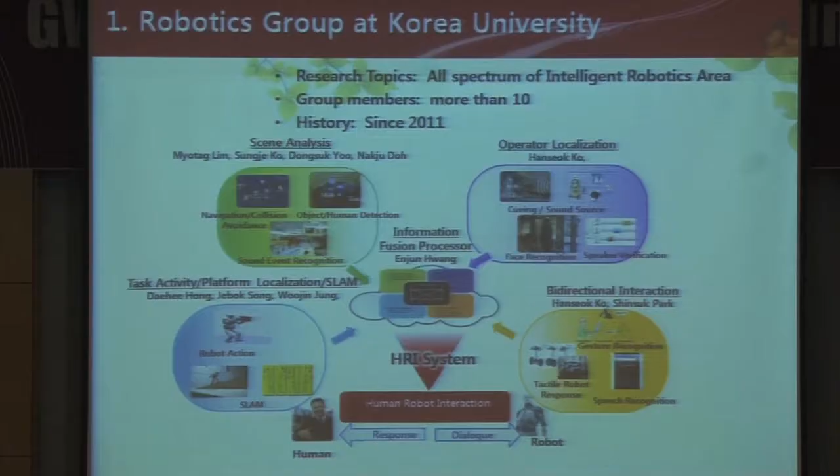These four components combine to form what's called the information fusion processor. I've listed out the names; I'm not sure if I've left any out, and if I did, please excuse me. I'm certainly very open to more names there.

Now I want to talk a bit about the challenges we're dealing with in terms of technologies. A robot needs to be interfaced not just with the world itself, but also with a human operator, so it has both ends of communication. I've listed out the important components, for example, robot movement, action, navigation, and how the robot sees the surrounding world, but also how it communicates with the human.

For example, gesture recognition and speech recognition are very important elements. Once again, merging and combining all this information is done through the middleware, and underneath that is the information fusion processor.

The idea is that until very recently, most robots we're familiar with were very much movement-oriented, and even though considered intelligent, still very passive. What we need to inject nowadays is to make it more interactive - interactive with humans, interactive with surrounding scenes, and interactive by utilizing resources from the cloud. Here's an example of what we envision.

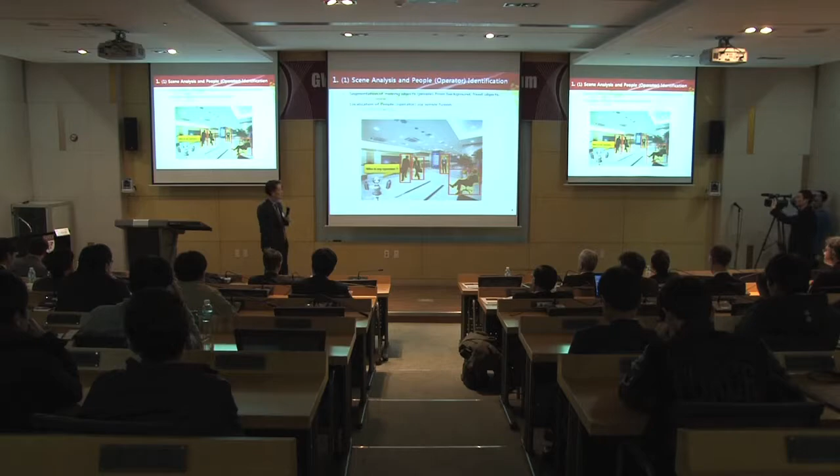The challenge is how do we overcome such environmentally challenging situations? How do we make it very environmentally robust?

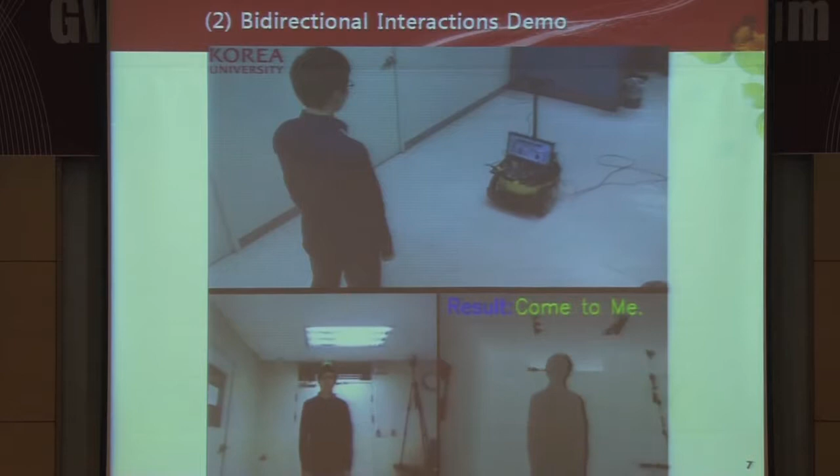Let's look at what the current technology is at this point. This person, one of my students, is making comments, and as you can see, it recognized the direction of the sound source, and then it also recognizes the gesture scene, which some of the faculty visiting today or this morning were able to see demonstrated.

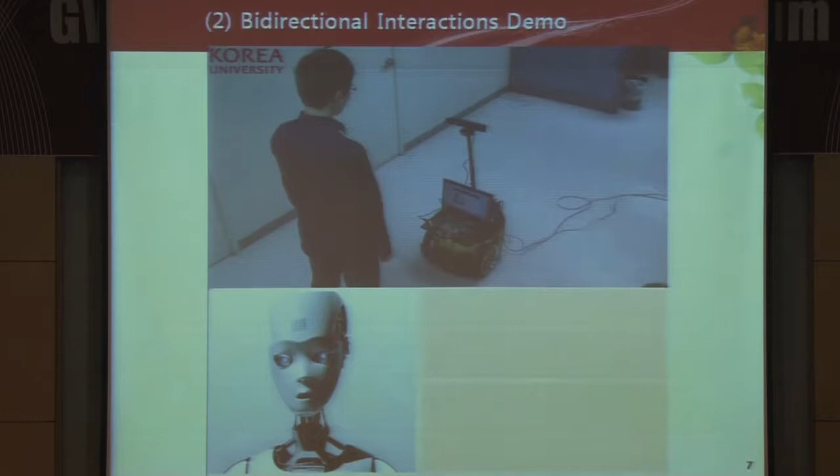And the system recognition—he's asking, when did I take my medicine? Obviously, the robot is providing some nursing assistance. So the robot responds that you need to take the medicine at 1 p.m. today, and so forth.

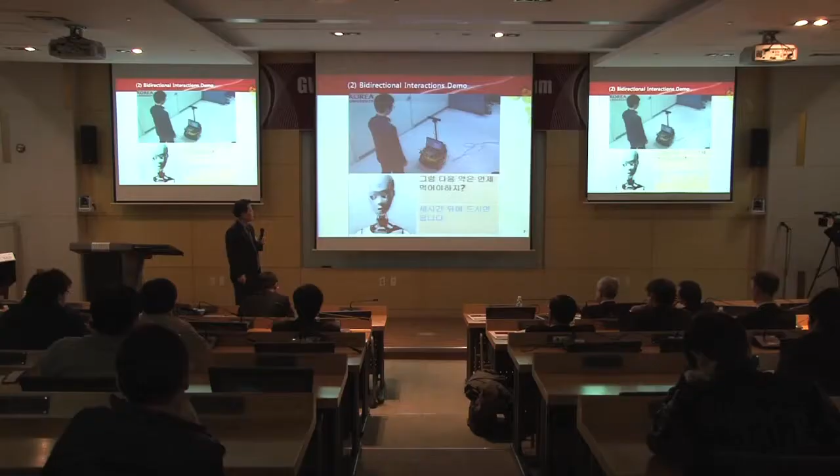So as you can see, it's not just engaging in a conversation, but engaging in a conversation has to be done real time, right? And a lot of computing power there is probably very much overloaded. So how do you reduce that computational overload and make everything work real time, so that human interacting with the robot feels very natural? That's going to be pretty challenging.

Let's look at another scene here. This is a robot. There are a couple of things going on here—some sort of glass breaking scene taking place. But there are also other sensors.

We want to call it a perception sensor network that allows, with some sort of communication network, sending information to a moving platform, which is the robot. So if there are cameras and microphones sending information about a certain accident taking place, the robot may not be aware, being remotely located away from where this incident occurs.

Indeed, there are other sensors that can also help. The only thing they can do is when they're connected. So connection, the networking, becomes a very significant challenge at this point.

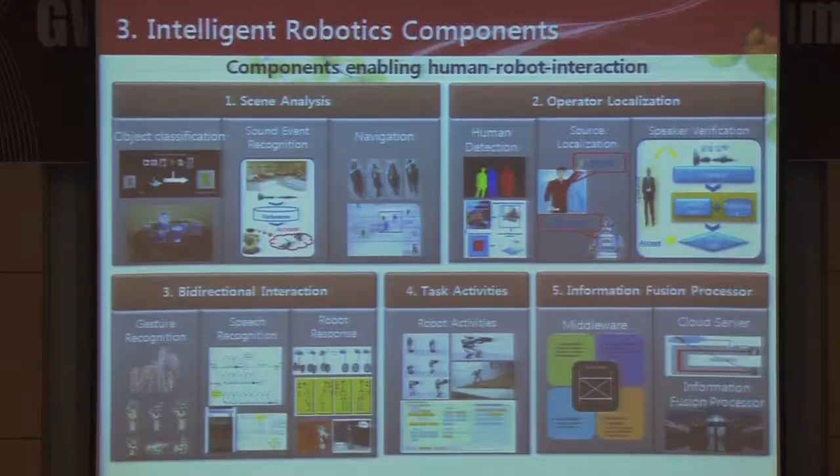So I've itemized different technologies here, important components from 1 to 5: scene analysis, operator localization, bidirectional interaction, task activities, and information fusion processor.

I'm going to go very quick since I'm running out of time. Here's an example of scene analysis. It needs to look around the scene, the background, and also be able to recognize where things are and what these things are. So there's a need for classification using shape and visual features.

There could also be certain moving objects. For example, if the robot is standing here, there might be some sort of moving object, maybe another robot, on an imminent collision course. What do we do? You've got to process that information and be able to take certain actions. So motion modeling also becomes very important.

I've listed out some of the technical issues. I want you to take a look at the brochure and go through these issues. I want to identify maybe one that pops up here.

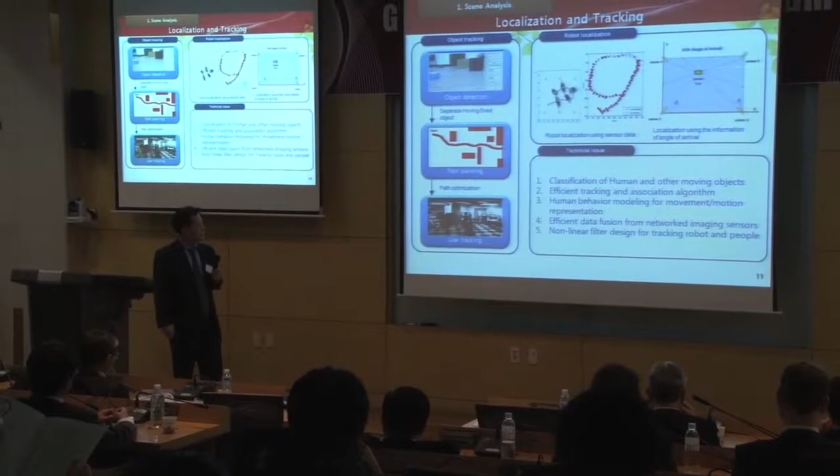This is localization and tracking, another big issue with maybe sensors, with different lighting, how the structures are surrounded. There's also a need for path optimization. A lot of work has been done in this area, but still there are plenty of objects that are not necessarily arranged in a neat fashion. So there's a definite need for a lot of different sensor and data fusion of networked imaging sensors as well.

We could also perform sound recognition. We saw that a little bit through another slide, so I'm going to pass on that.

Speaker verification is another hot area, being able to recognize who the master is, and perhaps use that also to segment different persons.

Operator localization is, as we gave you a demonstration this morning about where the sources came from, which direction the sources came from—that also becomes very useful information.

Human detection and tracking: if there are a number of people sitting or doing certain activities together, if I were the robot, how do you recognize that the person standing in the middle is indeed the person I'm trying to communicate with? That becomes very challenging because all these three people are overlapping each other.

There's a lot of people that are not necessarily all separated. So separation becomes a big challenging issue, and we have to do that under all kinds of different lighting conditions.

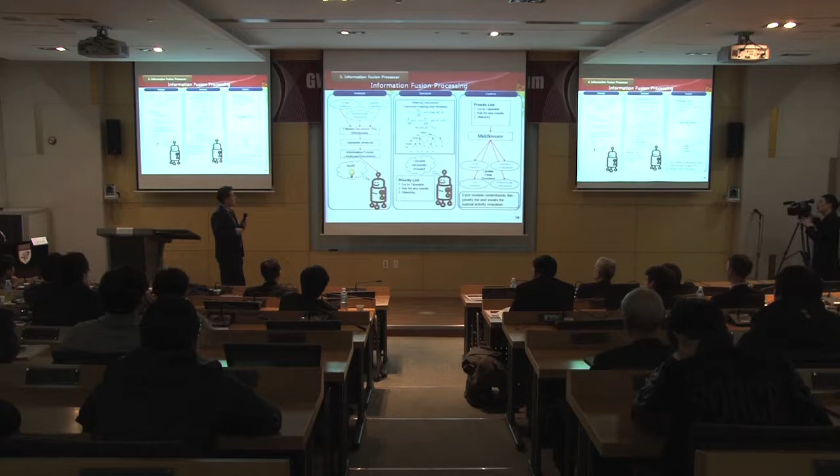But here, the robot needs to do certain reactions as a result of that, and the way it does this is by reordering the priority list.

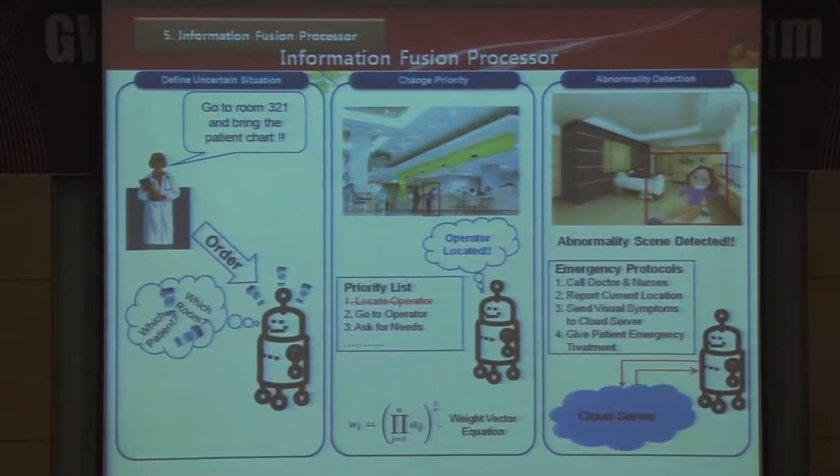Suppose, for example, the robot receives a certain order by its master: go to room 321 and bring a certain patient's chart. But while en route to that room, the robot finds some person collapsing. Then the priority list needs to be reorganized or reordered. That's the kind of thinking process the robot needs to go through.

So therefore, a lot of these models - models of actions, models of decision procedure, models of priority - need to be developed.

If you want to have different models for different actions and reactions by the robot, then we need plenty of memory space, and that can be done only with a cloud system.

The other thing is, what if there's a robot here, and then there's another robot which is closer to where things of more important significance are happening at the same time? Then we need certain hand-off type of steps taking place. That could be done only when you have this cloud computing, where all the information gathered is again computed in one common area - we call that the cloud system.

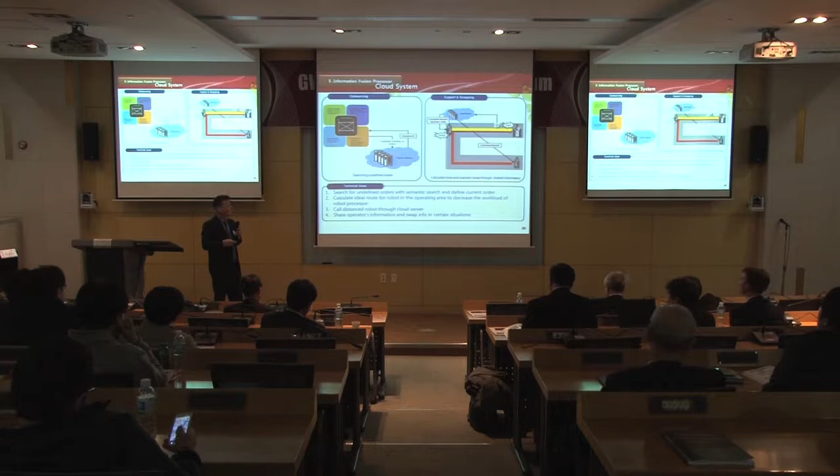That's where the information fusion processor is located. So all these six components are different technologies and techniques where most of the faculty involved with the robotics area now at Korea University are engaged. There's still a lot of work that needs to be done. We're very much excited, and we're looking at a number of different scenarios of application.

This is for the robot that's roaming around outdoors. Outdoor activity and the surrounding environment is also another big challenge. For example, Kinect wouldn't work outside, so gesture-type algorithms that could be used indoors cannot be equally applicable outside.

So we'll be looking into this, as there's even more challenge for outdoor activities as well. We also look at a lot of application scenarios for indoor services, particularly nursing assistance type services. We do have a hospital here on Korea University campus.

That's the same way at GW. So here, where the patients are located, a lot of assistance could be provided by a localized robot. For example, this patient is obviously going through some sort of pain and needs some sort of help by the robot. I didn't have time to finish all the translation, so certain things are still in Korean, but essentially what it's trying to do is have the robot provide services there. So it's one of the scenarios we're looking at seriously.

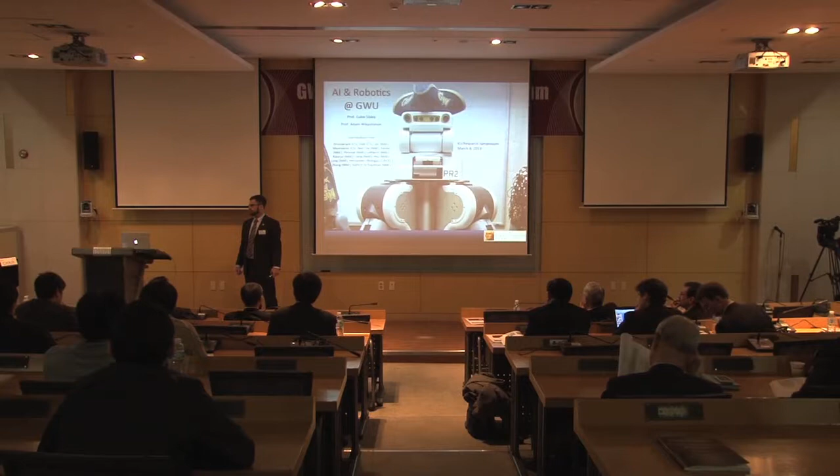Thank you very much. I think the siesta is in order. Lunch was wonderful, and now, of course, a little bit of a food coma.

So I'm going to talk about AI and robotics at GW. I'll introduce a number of my colleagues throughout my slides, and I'll dwell on my own work a bit more of necessity. Then I'm going to hand off about halfway through to Professor Adam Wikenheiser, who will talk about a bunch of the other work taking place in mechanical engineering.

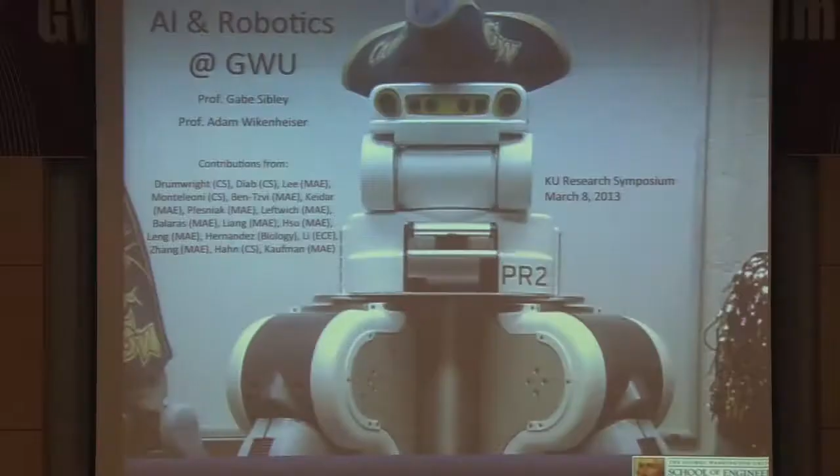This is the same story for accessing hostile environments, like exploring under ice sheets. We're not going to go there, at least not for very long, and do any sort of interesting science. Autonomous aerial vehicles are, of course, useful for surveillance and other applications. Autonomous cars—this is going to transform society.

This is one of my pet favorites: Rio Tinto has invested literally billions of dollars in automating mines in Australia. Kiva Systems was recently acquired by Amazon to automate a large percentage of their operations in their warehouses. So these machines are really coming online now.

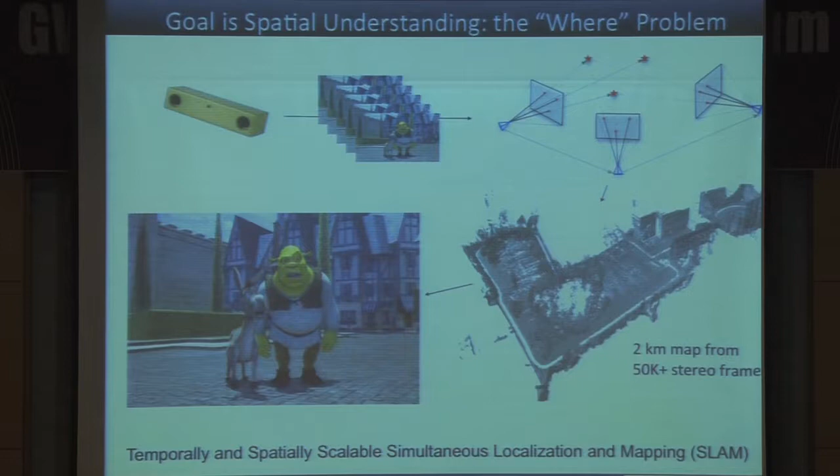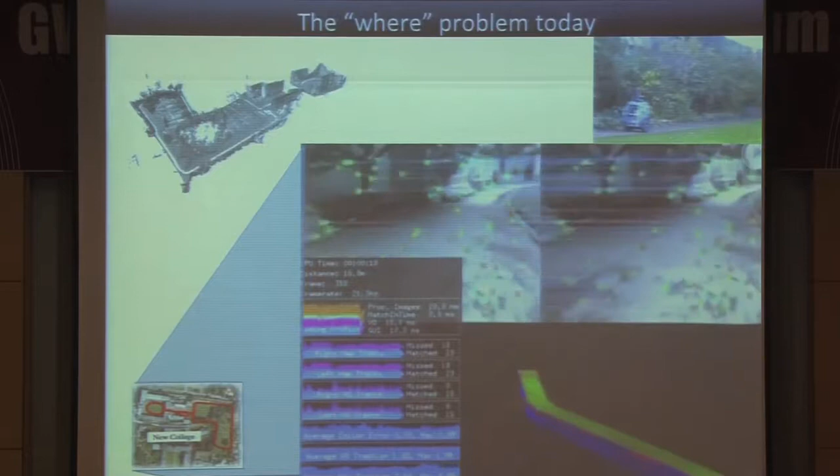So we're really interested in temporally and spatially scalable solutions to this problem, the so-called where problem — how to know where you are and where objects of interest are if you're an autonomous machine. For example, here is this robot Lisa going around and collecting data. It's got a stereo camera pair up front, lasers on the side, an omnidirectional camera on top.

And this down here is the left and the right image, and features being matched in the left and right image and tracked in time, all of which allows you to uncover the geometry, the trajectory that the vehicle has followed. And this is endowing the machine with basic spatial awareness.

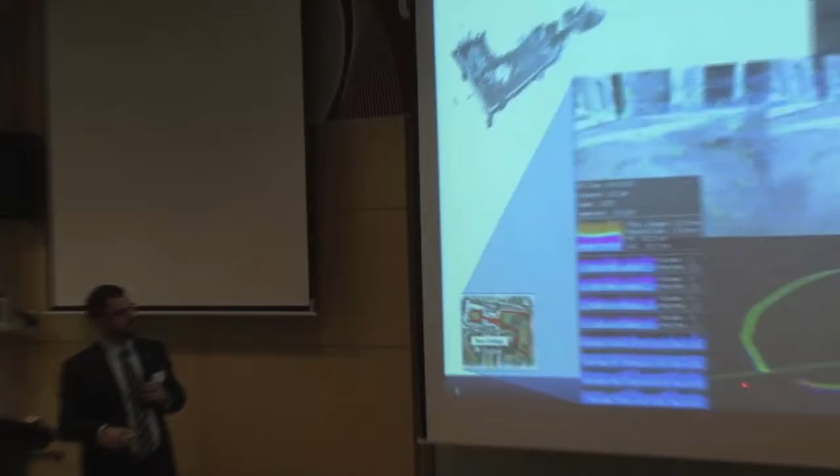So this will go on and go for a number of laps, and this is the open loop system running here. It runs for 2 or 3 kilometers, at which point it's only made a mistake of drifting by 2 meters. So it's not drift-free because it's purely vision-based, but it's still quite accurate. You can see this is the overlaid solution on the actual college.

But we said we're interested in spatially and temporally scalable systems. So here you see that 2-kilometer trajectory that was being estimated, embedded in a much larger map around Oxford. And here's Oxford, and here's the trajectory going down to London, and a bit more of this trajectory along London. So this is 121 kilometers of purely vision-based estimation, again trying to endow the machine with an understanding of its spatial relationship to the environment.

This is carefully anonymized for peer review. This is the system that was actually used for data collection.

The stereo pair on top of a bicycle helmet and a laptop on the back. As I said, these are being replaced with cell phones now. So it's over 7 hours, 121 kilometers, 200 gigabytes, many complicated real-world scenes like riding on a bus or an escalator or an elevator, riding the boats on Ferris wheels, things like that.

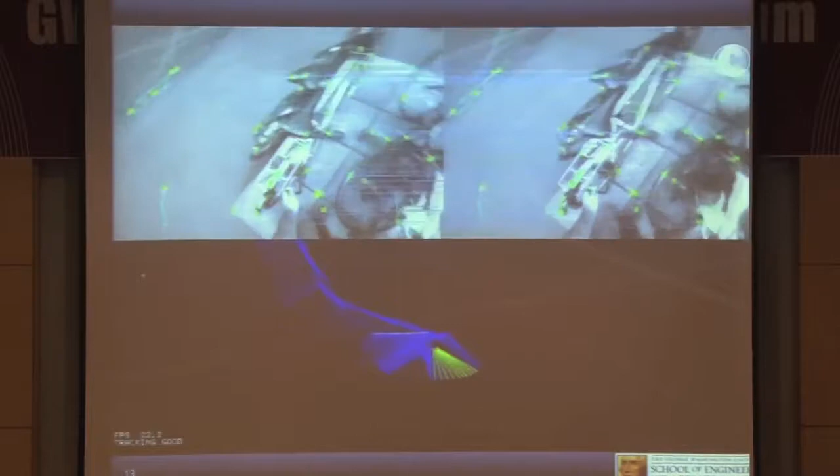Here's a bit of the beginning of this data sequence, and you can see the red, green, and blue X, Y, and Z position of the vehicle or the user as this system evolves in time, and the features being tracked. The point here is that this is not carefully collected data to make the problem easy to solve. It's explicitly from the wild, difficult situations, as you would encounter if you were a natural humanoid traversing natural human spaces. You can see the user here is looking down, getting ready to get on the bike, and you can see the direction the user is looking by looking at that red vector.

And as he rides away, you'll see the constant velocity motion estimate of the bicycle. This is the type of challenging situation that we're going to encounter in the real world, right? We want to open up that performance envelope to challenging lighting conditions, extreme motion blur, dropped frames. If somebody covers one of your robot's eyes, it still needs to function, right? So that type of robustness is actually extremely difficult to obtain. That's where a lot of the future work still remains to be done.

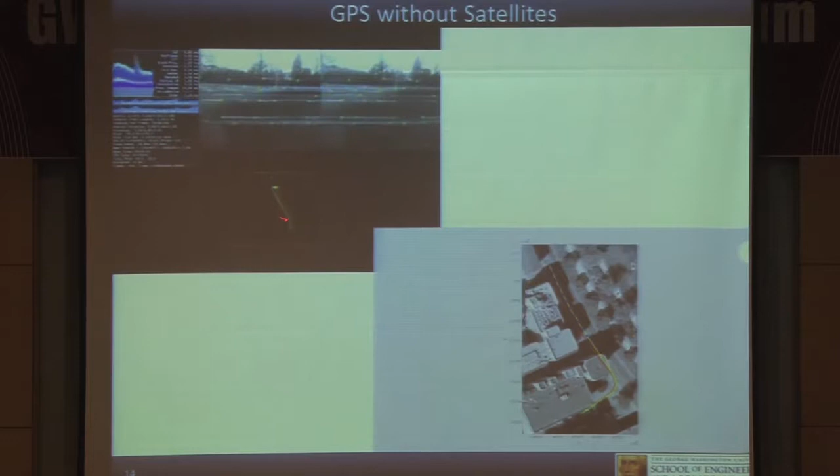Just an example of what you can do with this. So here you have the same system working on a vehicle. This is the beginning of a 1,000-kilometer sequence that's testing place recognition and object recognition, loop closure algorithms. And what you can see is the actual geometry of the road starting to unfold. We see it obviously. So armed with that, you can then try to generate synthetic overhead views and actually match what you see on the road to what you would see from an aerial image or from a satellite.

So this is GPS level pose estimation without satellites, just by matching what you see on the road to what you would see from overhead, right? GPS without satellites. And of course, this is going to be really important for automating the highways.

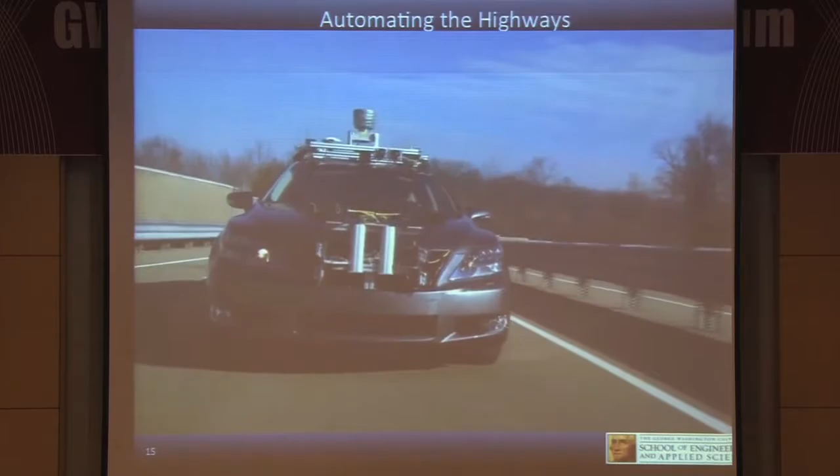I always like to tell the story: 10, 15 years from now, maybe sooner, our kids are going to say, wait, you used to get in those metal cars and turn wheels and pull levers and step on pedals to make it go? You guys are crazy. You should let the computer do that, it'll be way safer. And they'll be absolutely right. It's going to revolutionize our relationship to the vehicle and to our cities. It's going to be like a transformation from before automobiles to having automobiles. So that's a big impact that our science can have.

The future is also fast, so pushing that envelope on perception on platforms like Big Dog or RHex or this quad rotor here, which is cheating because it has off-board sensing, is very challenging. We believe that the future there, this is work by a postdoc, is in dense systems, estimating where every pixel is. This is many gigabytes of data per second being processed, too much to send to the cloud, but enough to really understand the local metric 3D structure that you're interacting with. That gives the system quite a bit of robustness.

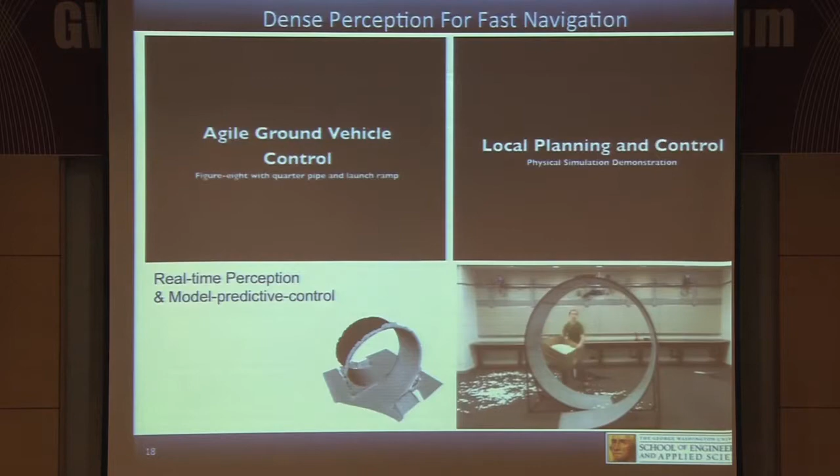And of course, armed with really nice dense 3D models, then perhaps you can do interesting things. This is ongoing work where we're trying to really tie the loop between dense perception, build these models, and then plan, paying attention to the physics, the underlying interactions with the real world, so that we can hopefully do things that you can't do otherwise. See, it's not quite there yet. The goal here is to build a car-catching robot, of course.

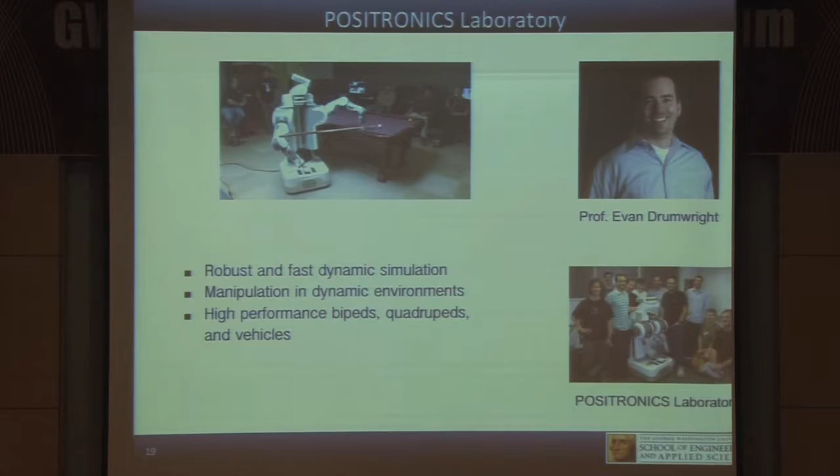Okay, so the Positronics Laboratory, partner in crime here, Professor Evan Drumwright. He is an expert in robots and fast dynamic simulation. So given these models from perception, Evan can tell you how the contact forces and the restitution forces, and how you should go about simulating your interaction with the environment to get accurate results. These are his students here in the Positronics lab. And that's not our PR2, but we actually do have a PR2, which is a wonderful platform for testing these situations and these experiments. Of course, there was great reference to natural language processing and actually speaking to these machines.

And that's what we want to do, right? We want C3PO, who is familiar with over 6 million forms of communication, so that we don't have to type, because we're really bad at communicating by typing, but we're really good at it by just speaking. So that's where you get into natural language processing.

And we're fortunate to have Mona Diab. If you're interested in NLP, she's recently joined GW, and she is a world leader in NLP, specifically in text translation and Arabic language, statistical approaches to NLP. Of course, NLP is intimately related to machine learning and computational statistics, and it fits within the taxonomy of subjects within computer science as a very core technique.

A lot of the techniques that we actually use in computer vision are borrowed from NLP. Who uses NLP? Well, today, obviously Google. We're talking hundreds of millions to a billion dollars. And this is another technology we're intimately involved with that is going to transform society, especially coupled with solutions to the perception problem along the lines of object recognition, place recognition, and relating that to the symbols that live underneath.

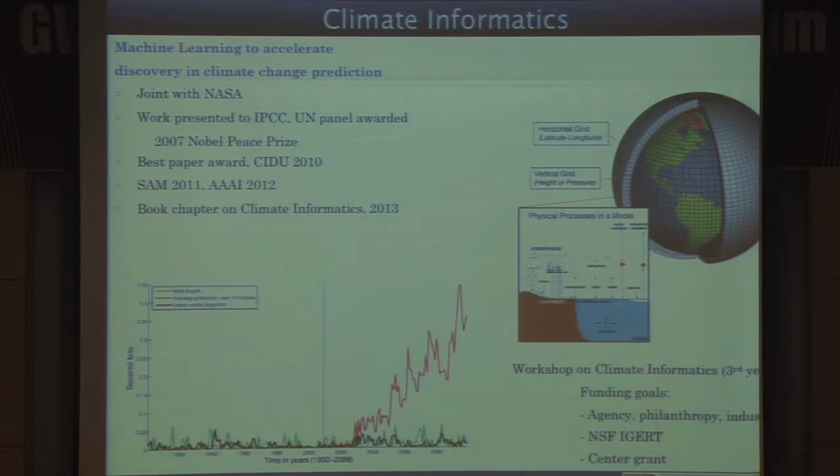Machine learning is intimately related again with natural language processing. Claire Monteleoni has recently joined GW, and she is actively working in machine learning. Her interests are particularly to do with climate modeling and climate informatics, applying modern techniques from machine learning to advanced climate models. She's had quite a bit of success running a workshop on climate informatics, which is getting a lot of attention. So these are modern computational statistics, modern techniques applied to very pertinent problems in sustainability and climate modeling.

Okay, so with that, I'm going to hand off to Professor Wickenheiser, and he'll tell you about a number of other ongoing projects at GW.

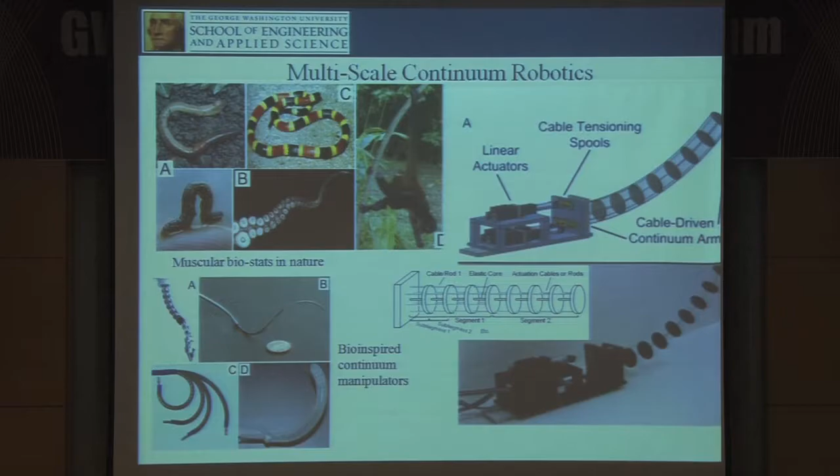You want to make the incision as small as possible, but you also might not know ahead of time exactly what route you need to take to get to the area that you need to either do your sensing or do your surgery in.

So the multifunctionality needs to exist between the actuator, the distributed actuation, and the distributed sensing. Because not only is it difficult to form all these different shapes and coordinate all the different actuators to work together, but you may not even know what shape you want to form.

So when you start to go into the body, there's got to be some way that you can work with the surgeon, but also use local feedback. If you start to run into something, you need to be able to decide, do I want to go through that, or do I want to go around? So that sensing has to exist there as well.

And of course, this is something that is very easy and second nature to all of these animals that can do these things. So they use sensing along their whole body to be able to manipulate objects, to be able to locomote, and transition between the two as needed.

On the right there, the monkey uses its tail both for grasping and manipulation, but also for locomotion. Some of these other animals use theirs as well.

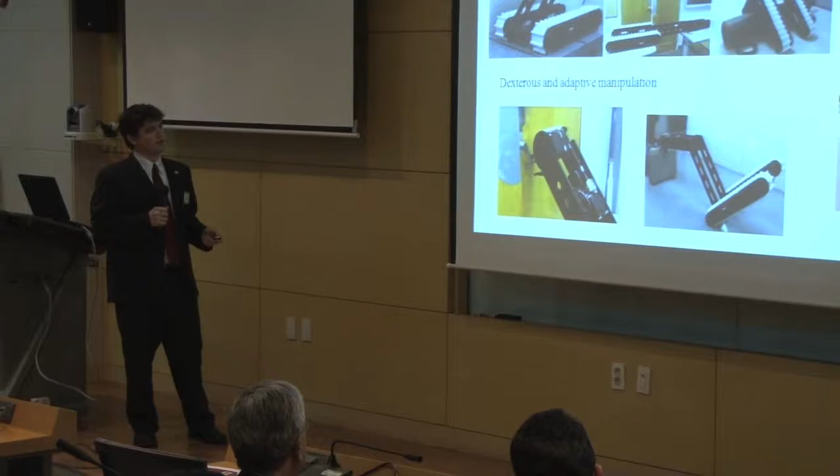So again, we have this sort of adaptivity between the locomotion and the manipulation. We have the same components here operating the door handle as would be used for manipulation and also for dragging it along if needed.

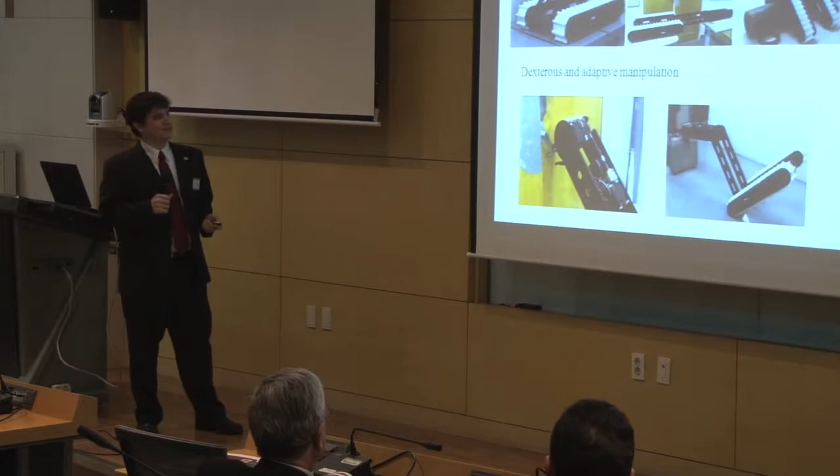And the thing that's interesting about this, in the words of Professor Ben Sweet, is that it has a high payload capacity, so it can actually carry itself as it goes through these different morphological changes.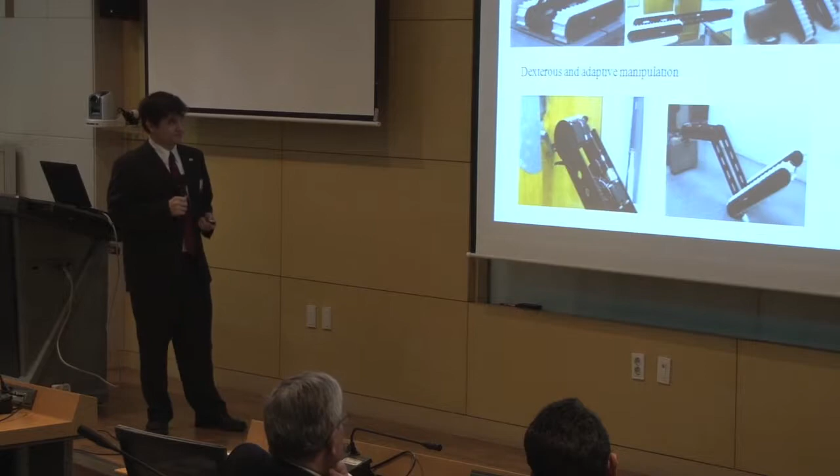So this is a little bit of my research here, another bio-inspired design. In this case, we're looking at wing design and incorporating some of the features of bird feathers.

One thing that's sometimes a misconception about bio-inspired engineering is that we're trying to duplicate what happens in nature, and that's not the case here. We're still using man-made materials, and we're trying to approach natural systems, but also keep in mind the fact that we can do some things that nature can't do.

We have these revolute joints. We can put processing into the actual sensors and actuators to short-circuit the feedback loop.

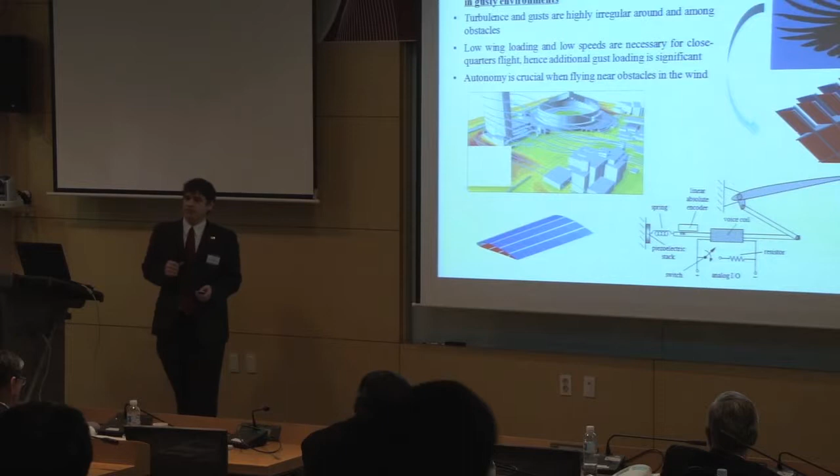And one of the things that I'm interested in here is looking at very small and very lightweight vehicles. There's a large demand for bringing unmanned aircraft into smaller, tighter environments and also unknown environments where you might need to make split decisions.

As you shrink the size of the aircraft down, you necessarily have to shrink the weight of the aircraft if you want to fly it at low speeds, low enough to avoid collision in these tight environments. Unfortunately, that's a deadly combination when it comes to wind gusts and turbulence, because now you're talking about a disturbance that's significant compared to the total energy of the system, or the total inertia of the system.

Not only that, but you have this very structured turbulence around buildings. This is a simulation, I believe at MIT, to look at the flow around different man-made objects. You can find similar simulations through forest canopies and across mountains. So you have these large, structured gusts and wind disturbances that are on the same order of magnitude as the size of the aircraft.

So one wing could be experiencing a completely different flow from the other wing. One wing might have attached, almost laminar flow, while the other could be completely turbulent, or could be experiencing a vortex shedding oscillation that interferes with one of the dynamic modes of the vehicle. So there's a lot of unknowns that occur here.

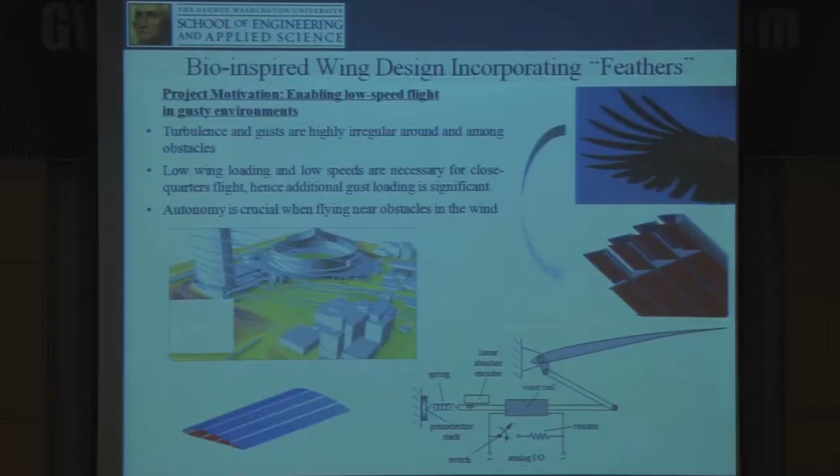But of course, birds can fly through these environments very easily, right? One thing that comes to mind is looking at seagulls on the shore. You have these very strong winds coming off the water, and yet they're able to make very small adjustments with their wings, particularly the wingtip feathers, and remain almost hovering in the face of these very strong winds. And they can keep their eyes steady.

So scavengers, birds of prey, obviously to feed, they need to be able to detect the prey that they're going after. And if they're being constantly rattled by turbulence, they're not going to be able to see these things from great distances. So of course this has application in surveillance and also targeting and mapping, where you might need the sensitivity of the sensor, whatever that happens to be.

You might need to be able to remove some of these disturbance loads that you get from the turbulence. So we're looking at how we can mitigate that and isolate it towards the wings. It's almost like a reflexive action—if you touch something hot, you're going to remove your hand before your brain even registers that you did it. So what we're looking into is how do we put some of this intelligence of how to respond to wind gusts into the wing itself, so that we're locally responding to the disturbance and not relying on inertial measurements.

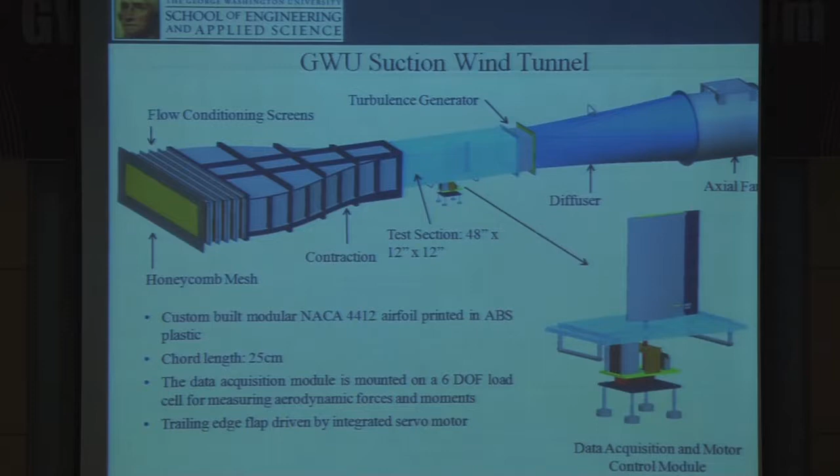So this is the design that we came up with here with these segmented panels. This animation here just shows some of the different configurations that the panel has. And what we're really looking into is actually propagating the response to this disturbance and keeping it local to where it occurs. So for example...

If a wind gust happens to hit the center of the wing, then you would respond to it right where you detect that wind disturbance. So those sensors that detect the change in pressure would then have a counteractive response. And if those feathers can't generate the necessary counteraction to keep the fuselage of the vehicle stable, then they would propagate that error signal to its neighbors, and those would start to chime in and respond to the error. And if they can't respond, they would move to their neighbors, and so on. So it keeps the response as local as possible, and it scales up so that you don't involve too many actuators or too few actuators, depending on what the disturbance is.

Another thing that's interesting about biomimetic engineering, when you start to actually look into how these systems respond in nature, is that there's always a mix of a passive and an active response.

If you look at traditional robots that are rigid structures connected with a finite number of actuators, that's basically a fully active response. Everything that occurs is occurring because you tell it to, or the intelligent feedback tells it to. But if you want to really respond to the unknown, you need to have some passivity built into it, in order to increase bandwidth and localize the response to the disturbance.

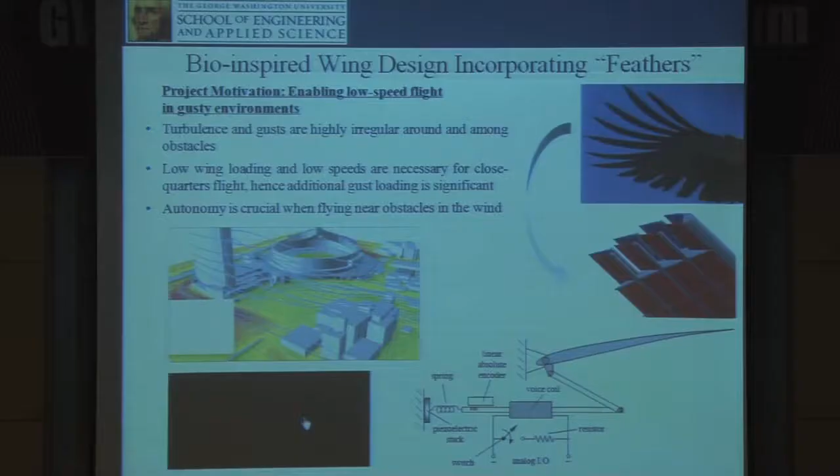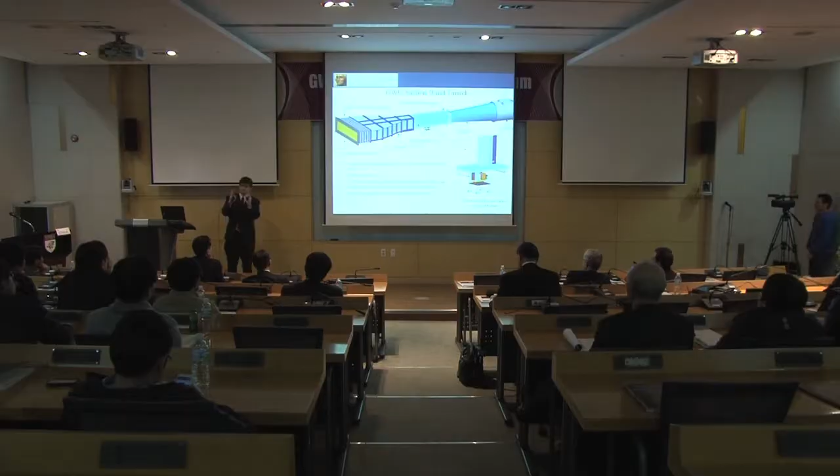This is the wind tunnel test facility that a number of the faculty members in COBRA, our biomimetic group, use. It's located at our Virginia campus in Ashburn, Virginia. The interesting thing about this wind tunnel is that we have a programmable turbulence generator. It's basically a series of panels that can either rotate so they're completely blocking the flow, or move so they're parallel with the flow and allow it to pass through. This can be programmed by our data acquisition system.

Right now it's being used for two different experiments. One is to simulate vocal folds and the airway that passes through the larynx, that's Dr. Plesniak's group. We're also using this to reproduce the type of realistic flows you'd see flying down the street between buildings, where you have the mean flow, and then a cross flow coming from an alley or cross street. So we're able to simulate some of those large structured disturbances in the wind tunnel.

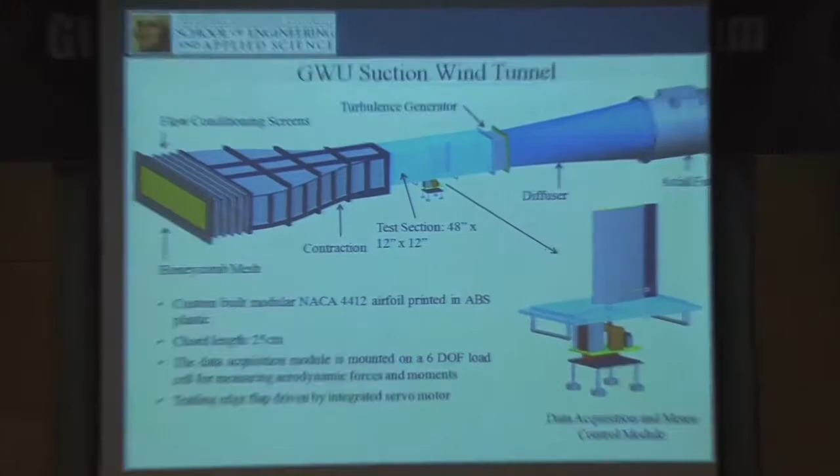And so we have our test section here with a wing section, and we can actually remove panels along this section and install our series of electromechanical feather modules, then measure the overall aerodynamic forces on the load cell down here.

This is another project by Professor Megan Leftwich, where we're looking at bio-inspired swimming robots. In her case, she's interested in the propulsive mechanism of how vortices are shed from the trailing edge of these very elastic, very flexible fish.

The actual animal that she's interested in mimicking is a lamprey. It's a fairly old animal, been around much longer than most of the other fish present day in the ocean. But it's also a very capable swimmer.

It turns out there's a very strong coupling between, again, this idea of being somewhere between fully active and fully passive. The fish sends commands to move its tail back and forth, but there's also a fluid structure coupling between the passive flexibility of the tail and its ability to shed vortices in order to propel it forward.

So what she has done is create this robot with 13 segments, and the path planning that this robot takes is actually based off video of actual lampreys. Based on the speed the robot can attain, it changes its shape in order to match the curvature of an actual lamprey swimming at the same speed.

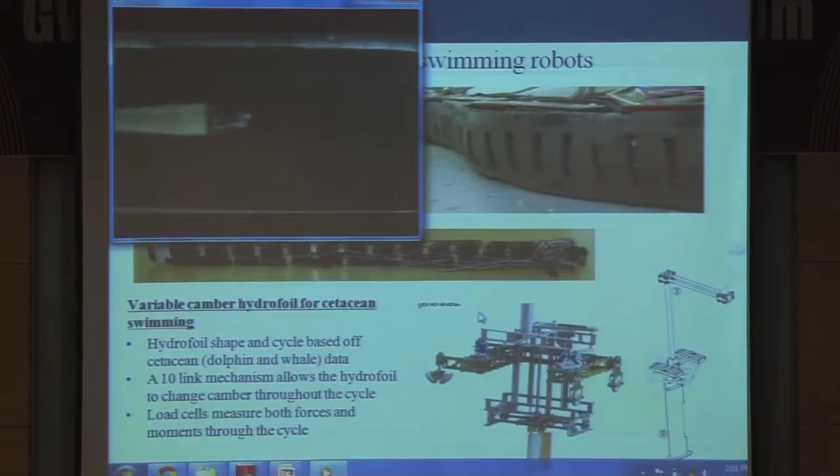So she matched both the active deformation of all of these servo motors to the active bending in the actual lamprey, and also matched the skin that's over it to the actual stiffness of a lamprey skin.

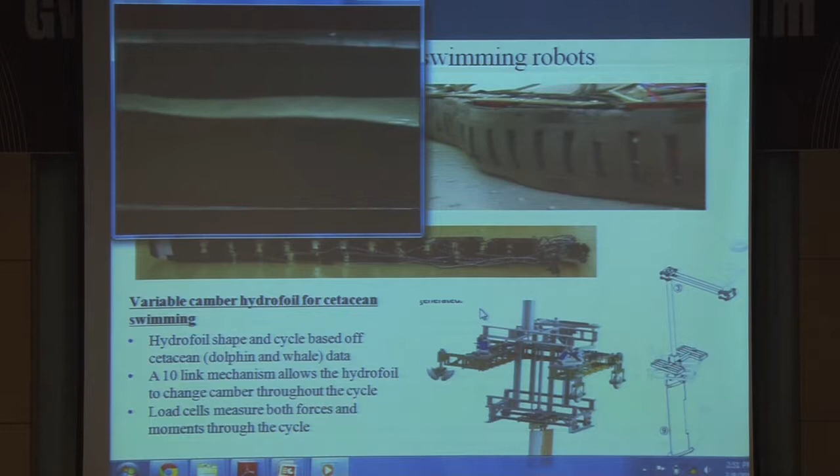So both the passive and active deformability are matched in this case between the man-made system and the natural system.

Another project, which unfortunately I wasn't able to get a video of, is looking at cetacean swimming, so dolphins and whales, particularly their tail, and how they use both active and passive deformation in swinging the tail back and forth. This mechanism rides on two rails, a pair of wheels, going along the side of a long water channel, and it can be either self-propelled or placed in place and let the water flow through, looking at combinations of both static and dynamic swimming.

This mechanism looks pretty complicated because it can affect the phasing of the thrust of the tail and also the camber, how the tail moves back and forth, and whether we can mimic the passive and active deformation by scaling how the camber is coupled to the thrust motion up and down.

This is another project I'm working on with the Naval Research Lab, as part of COBRA, our bio-inspired engineering program, where we're also looking into bio-inspired control systems.

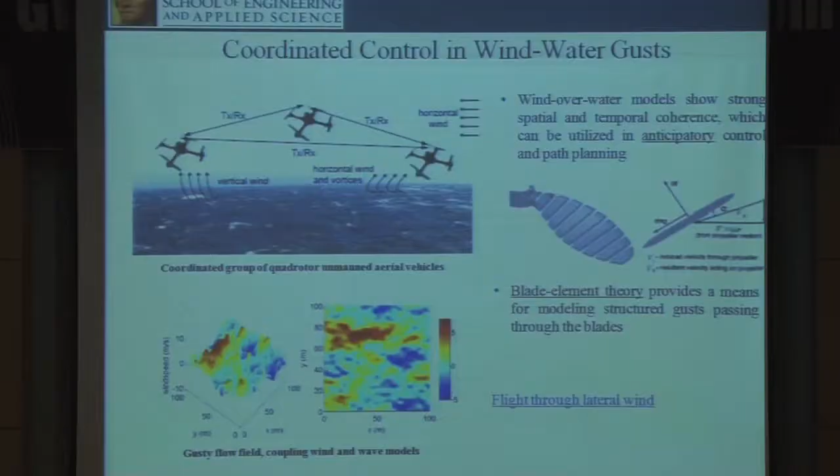In this case, we're looking at how groups of unmanned aerial vehicles can move over the water and maintain a formation that minimizes some type of cost function, which may be minimized to maintain a certain level of communication, or to maintain a certain coverage if they're looking at the sea, trying to find submarines, something like that.

But it becomes very tricky because over open water you have very strong wind gusts, and they're very structured. So you don't have a random white noise gust, you have something correlated, particularly when you're only a few wingspans above the water itself.

Once we got down there, we found we could generate some coherent models of the wind-water interaction. So phase one of our study was to develop these models and put them into a form we could use for control design, a stochastic structured disturbance into the wind.

The other thing we needed to do is that a lot of the quadrotor models out there assume basically thrust is proportional to the speed of the motor. Because we wanted to incorporate the effects of these structured gusts, we had to go back to the model and break it down into what we call a blade element model, taking into account the suction, the downdraft due to the spinning of the propeller, and also due to the wind model coming through.

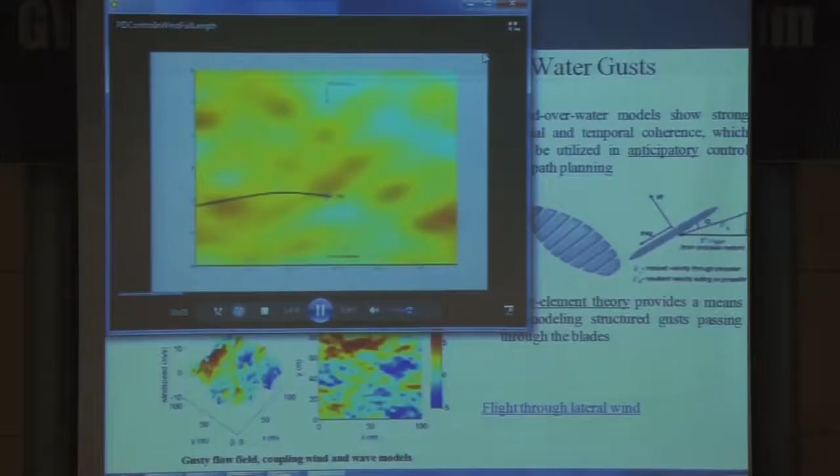This is a simulation of one of the vehicles flying through this wind model. The wind is going top to bottom, and the vehicle is trying to fly left to right. It takes a little while for the vehicle to realize what's going on, but as time evolves, it takes into account the pattern of wind coming through. This is a simplified model because we just have a constant...

...sine wave on the surface of the water, so the wind generated over there is correlated, and it's something the vehicle can learn as it starts to fly over time.

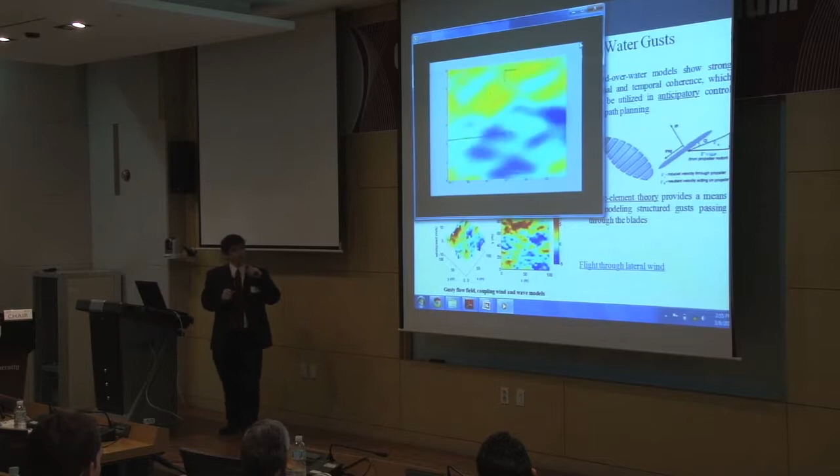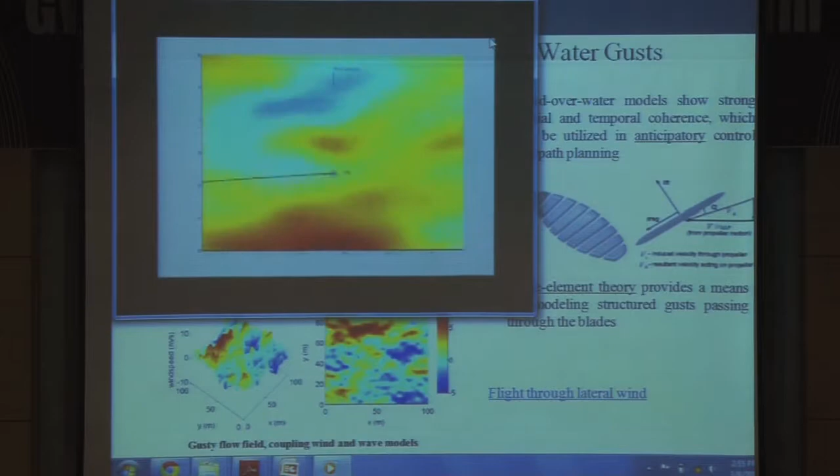So this is just one vehicle, and what we're interested in is what if we have a group of these vehicles with a very correlated structured gust passing through the group. It's going to affect the vehicles in the order they're placed, so if the gust is coming from the north, the northernmost vehicle feels it first. It should communicate that information to the vehicles to the south so they can reconfigure themselves before the gust hits, so that once it hits, they'll be pushed back into the configuration they need. We're looking into developing a neural network, if you will, between these vehicles, and the information they'll pass is the gusts they see coming in from the wind-water wave interaction.

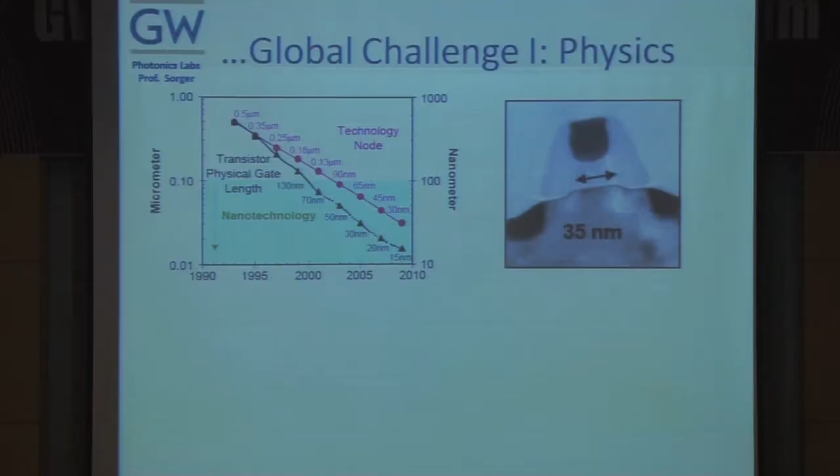But you see down here, we're getting to really, really small scales. Can you just split atoms at the end? That would be a big challenge. In other words, currently, the transistors in this computer running this PowerPoint right now have a gate length of about 35 nanometers, basically on this order. If you zoom in here, we basically have this kind of gate length, or gate oxide.

You see these little dots - do you know what they are? They're individual atoms of this material. That's getting to the order of like 10 to 12 atoms in an ultra-scale device. That's not much - we cannot go much beyond that. In other words, we are down to the individual atom level very soon.

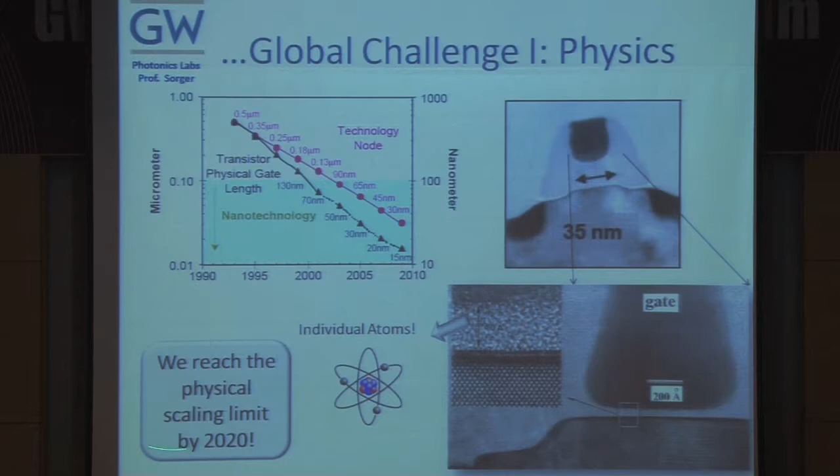By 2020, essentially, the International Technology Roadmap for Semiconductors says scaling is done. No more scaling - it means no more new, faster computers. So what happens to Intel then? What happens to our devices? Will we not have a new nice iPhone every two years? Well, that's a huge challenge, really.

So with electronics, there are certain limitations. The second global challenge that we are facing is data.

Everything's going towards big data, and big data needs a lot of energy. Companies like Google and Facebook have their own data centers, and they put them typically either in northern locations like Alaska, if they can, or more recently next to a river, because they need so much power. They literally need a power plant to drive these data centers.

So we have a lot of data, and it's growing. The compound annual growth rate is really, really fast, exponentially growing. In the United States currently, there was a report from a Stanford professor that we are already using 2.2% of electricity nationwide just to communicate. And look at its growth rate. So what happens in 10 years? In 10 years you use 110%, or more than 100%, of electricity for communication. Well, that's unrealistic. So we need to do something.

So we fundamentally have a challenge that we need to address. For instance, if GW communicates with KU, we use fiber optics to send information, and you can ask: how many photons do we need to send a bit of information? It turns out we currently use about 100,000, and we're kind of getting towards 10,000, but that's quite a lot. What my group is looking into is can we get to an attojoule per bit? Can we get to 100, maybe 10 photons per bit? We really want a quantum leap forward in this research.

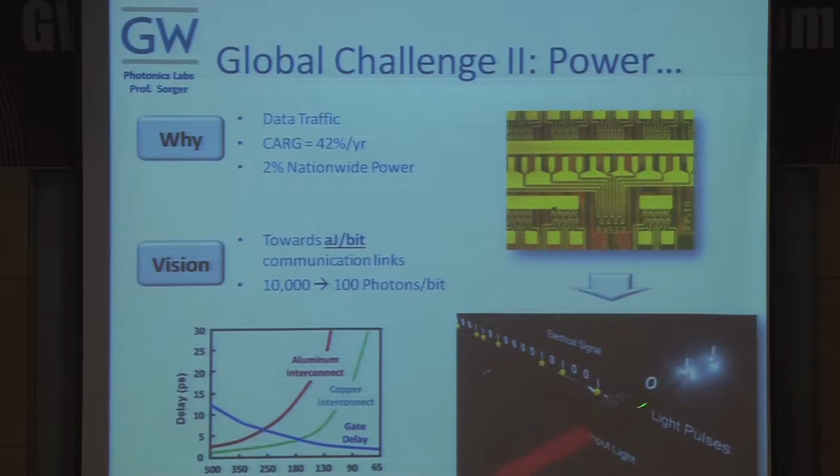This is some work from IBM. This is, for instance, an electro-optic modulator or switch, which sends data and you get some kind of data out. This is something that my group is also focusing on as a core area.

Within this background, photonics has been seen as one of the big solutions. Photonics and optics can go beyond those physical limits that we often see with electronics. For instance, one of my colleagues here, Professor Ergun Simsek, he has this WavesLab, and he is taking on some of these challenges.

For instance, the idea would be to look into sensing. I think what I really should have done is put a picture of, you remember Star Trek, they have these tricorders, and they walk around and kind of detect life signs somewhere, like in the Star Trek shows. Basically this is almost what he's proposing, and the idea is to combine nanomaterials, like these metal dots, with new materials like graphene for conduction, and then with light as well. This will be a very effective sensor.

On the right you can see an example: if you apply voltage to this graphene, we change the wavelength of operation, and we have two conditions, either dielectric or metal, and you can effectively switch between these two regimes. This gives you a very good detector. Here's some simulation work showing the change of this resonance structure, and it's a very good sensor.

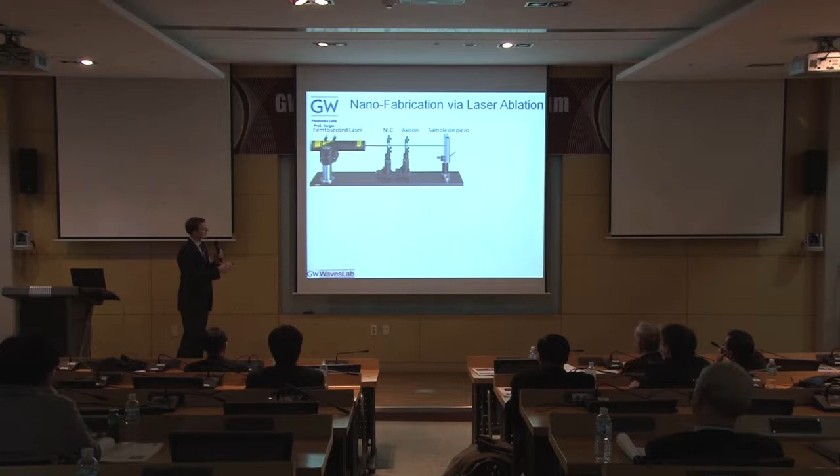The second thing this group is looking into is some nanofabrication schemes which are very new, or not necessarily new, but very elegant, and can be done on a tabletop system. For instance, here's a laser with a crystal, and he has a sample on the other side. You can send light in from one side and get higher harmonics, creating a beam profile pattern that is above or below a certain threshold for your system. Then you can create a kind of nanostructure pattern.

This is just the first prototype, still something to develop. But what you can see down here, if you track the reflectivity of such a system, you can really get a pretty nice cavity, a pretty good resonance, which can be used in shifted form for sensing applications.

So the other part is, in terms of sensors, typically what you have set up is something like this: a big lamp housing of large size, fiber, polarizers, an array. You have an entire big setup, maybe a meter long on your table.

So going back to Star Trek, wouldn't it be nice to put everything like this into a phone? And it turns out we actually can. The keyword is photonics, and the second keyword is integration. So what we really want to do is take these approaches, making everything nanoscale, very small, and put it as an integrated platform into systems like smartphones.

Remember 10 years ago, or maybe 15 years ago, you could buy a digital camera — it was a new thing. Now the camera is somewhere in here in these smartphones, and you use it every day. You take it for granted. Cameras of this size now.

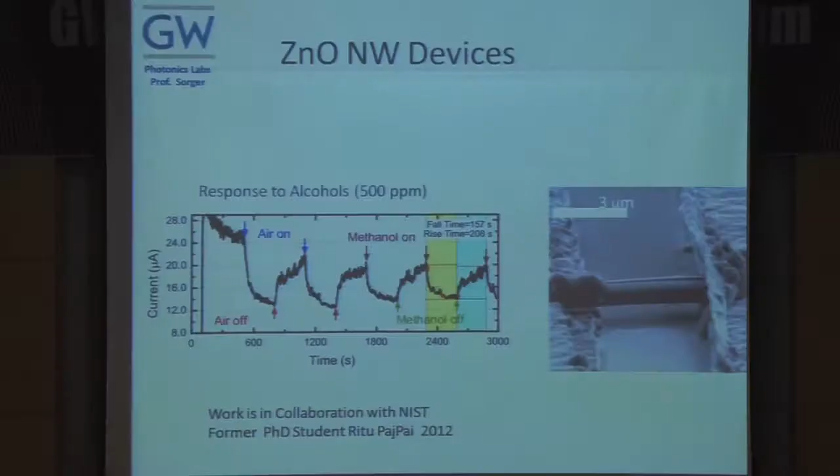She's collaborating with the National Institute of Standards and Technology, NIST, which is up in Gaithersburg, close to GW. You can do the same thing for air, like nitrogen, and see pretty reproducible examples — you turn on this system, turn on the flow of air or nitrogen, on and off, and it's very repeatable. It's a very robust system.

With this, I'd like to move on to my next colleague, Professor Samuel Lee. He's in microfluidics and also nanophotonics.

He concentrates on things like trapping cells. He has a microfluidic channel, a very sophisticated channel they built, like a microchip or lab-on-a-chip system, with a lot of valves and pumps and everything you need. Here's a zoom into one region: you have a flow of analyte, maybe a blood sample, and they can capture certain molecules in this area. Because they're captured and localized, you know where to look, and then you can detect and read it out.

Another idea, again drilling on integration: let's say you have a typical optofluidic system. It usually looks like this - an optical table, lasers, and here's your sample, with a pump into your sample. It's rather bulky. Can we just do the same thing on a small chip size, very cheap for production, Intel or Samsung style? That's what we want to do. And the idea is, yes, we can. They fabricated such a system down here, and here's a little coin as a comparison.

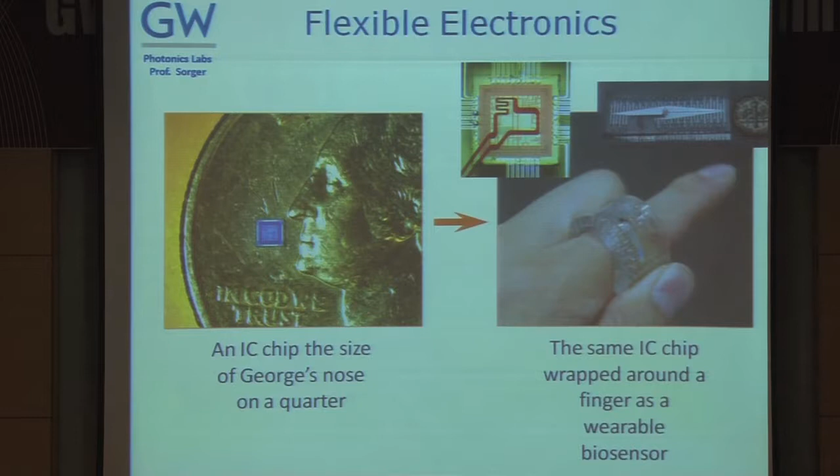The other nice thing about these systems is we can make them flexible - they don't have to be stiff, hard, and brittle. Maybe you can integrate them into clothes, like gloves or something wearable, with a very low cost function. This is work actively being done currently. Inside here, you see these different channels are microfluidic channels where you can release an analyte, for instance for medical testing, and get a very good readout. That's the power of flexible electronics that Professor Samuel Lee is focusing on.

With this, I'd like to go to my group. My group works on optoelectronics and integrated photonics - this is basically the homepage of my group, still a bit in development, but please go to this, I think it's in my resume at the end of the booklet. We want to concentrate on it. Basically, the pitch is the following.

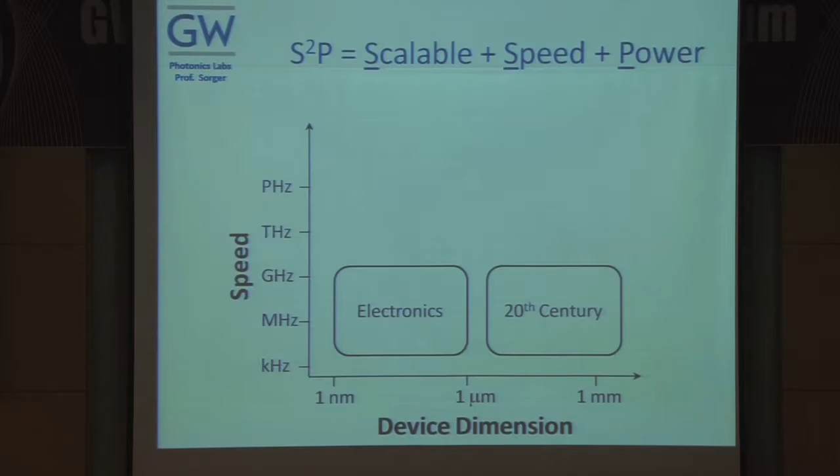If you look at device architectures, here's speed - how fast we can modulate something - and here's device size. The past is basically there: everything was large and slow. Intel came along and scaled things to make them fast and small, towards nano-size gate length. But your computer is still what, 2 gigahertz maybe, 2.5, 3 at most - it's been stuck there for like 10 years. This is because of the interconnect data I mentioned earlier.

With photonics, it turns out photonics is really great - it has time scales on the order of femtoseconds. A lot of nonlinear effects you can use for switching and data routing are really fast, but photonics is governed by the laws of physics, the diffraction limit of light - you cannot make it smaller than half the wavelength. So the idea would be to go to this quadrant where performance is increased, and this is what I focus on. We use nano-optoelectronics, meaning semiconductors and devices in this regime, trying to integrate the best of both worlds.

One vision is that computers and smartphones in the future will run with light - little light paths inside your computer. The trend, I can already tell you, is proven: we are going in this direction. When we communicate over email, your email is converted into an optical signal, sent around a fiber, and converted back into a computer signal. We use optics not only for long-haul communication but for local area communication, data centers from rack to rack, and soon on-card, then intra-card, then on-chip or intra-chip. Currently we are somewhere about here.

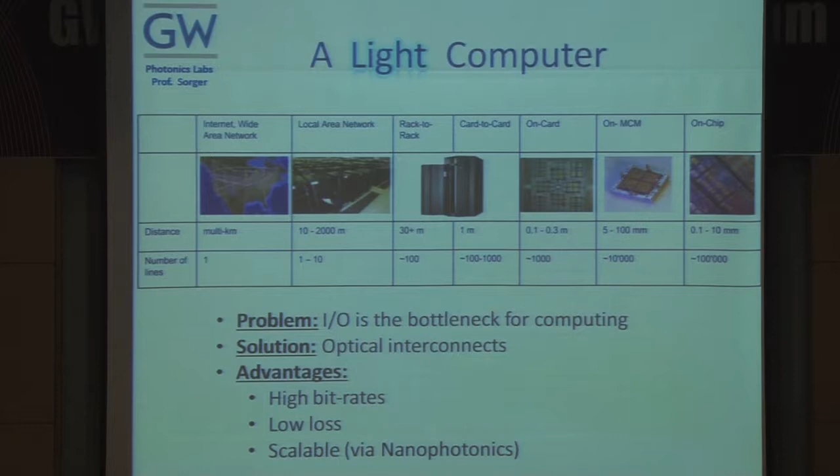The solution is basically going optical, and the advantages are higher bit rates. A 10 gigabits per second rate, you really get with photonics, or even much, much higher. Low loss, and it's actually scalable via nanophotonics. So we really want to do what Intel did for the last 40 years, now with optics.

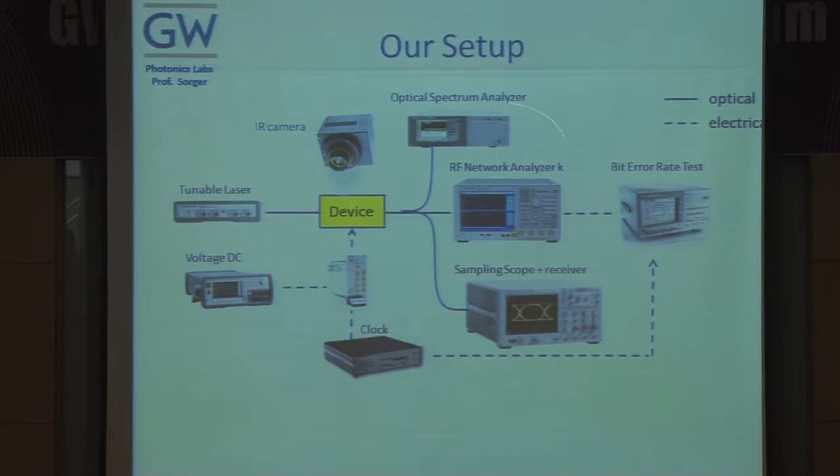This is actually our device setup that my group will be setting up very soon. Here we have tunable lasers, cameras, network analyzers, optical spectrum analyzers, bit error testers. It's going to be a very powerful system for high-speed testing. So I want to invite you, if you have an electro or optical system that you want to test at high speed, come to me and we can work together.

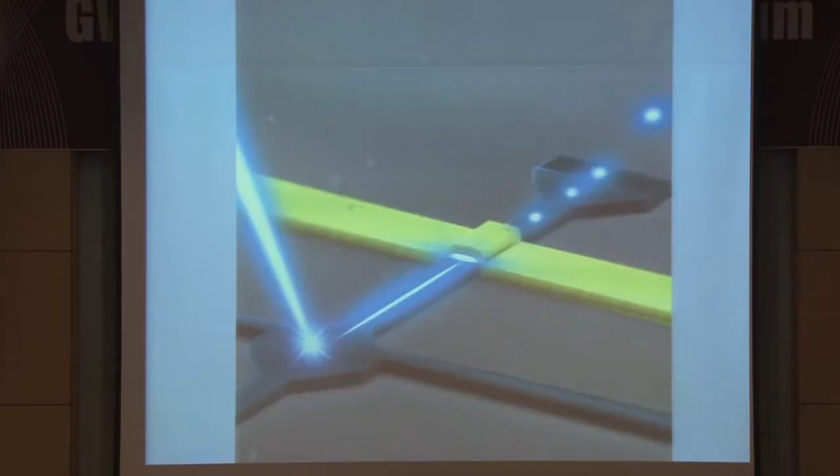We do novel device detection, electro-optic measurements, again for high speed. This is one example of the work from my group, shown here in a scanning electron microscope. Let me highlight a few things: this is actually a photonic transistor, and like a transistor, it's a three-terminal device. Current comes from one side, goes out the other, and you have a gate to control it. We do basically the same thing: light comes in, here's our gate, and we have our data light coming out.

One thing I'd like to focus on is this part here. It's basically 3 lambda long — lambda being a wavelength — that's super, super tiny. Typical devices of this kind, called an electro-optic modulator, are on the order of a centimeter. We are essentially 1 to 3 micrometers long — that's 10,000 times smaller. That's really the power of these new systems, these metal optics and plasmonic systems. We squeeze the optical mode to extremely tiny areas, enhance the field, and get extremely strong interaction. So that's a very new approach.

This is basically for a single data channel. If we then use WDM, wavelength division multiplexing, we can go further — we have 1 terabit per second for 1 channel, and if you use 100 channels, we basically get 100 terabits per second — and that's just for a single fiber. That we can put into a computer or into your smartphone.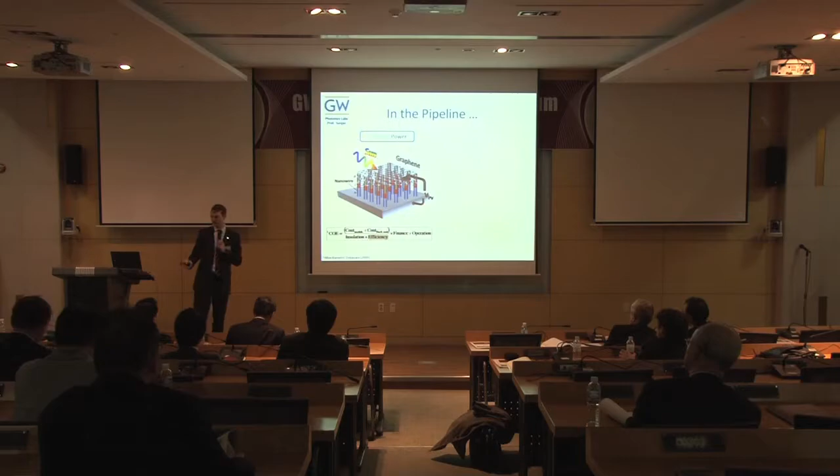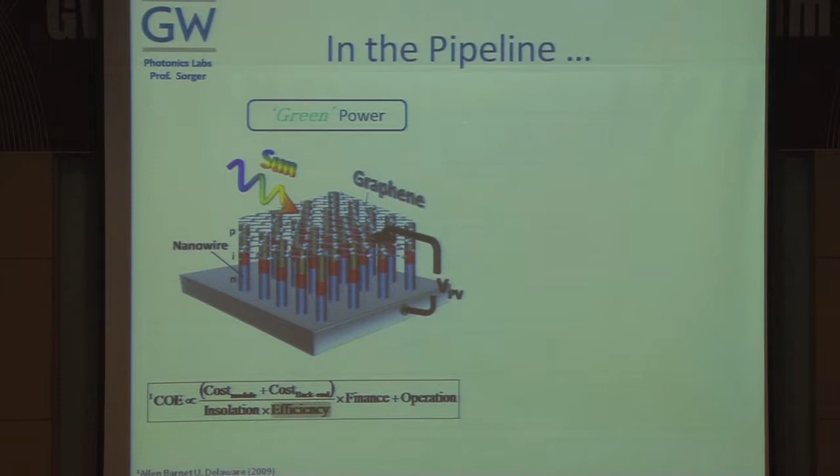It's essentially like a new type of solar cell. The idea would be to replace the top contact, which is currently aluminum and reflects a lot of light, with what's called a transparent conductive oxide, or transparent conductive material. We use graphene because it's highly conductive yet monolayer thin, so sunlight can go through and reach the solar cell without being reflected. Then we can use PIN junction nanowire arrays, which have been shown to have really high efficiency absorbing sunlight. This could be a brand new system — I've not seen anyone working on this. So if you grow nanowires or graphene, please talk to me, let's get together after this and discuss.

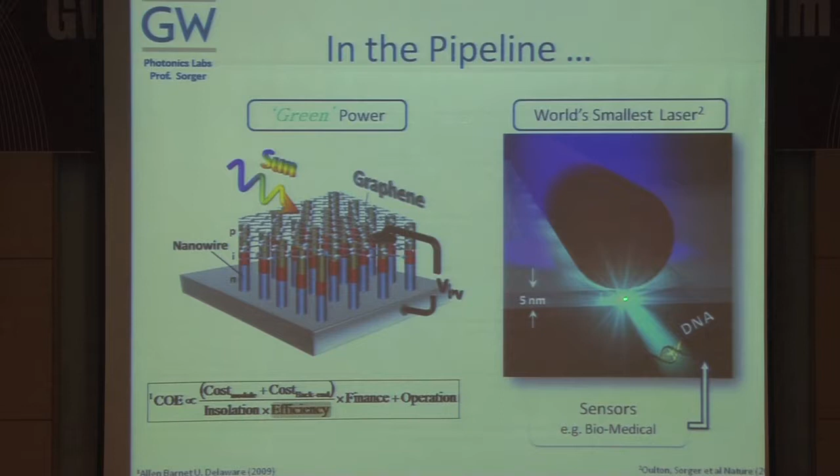Here's one system I've done a little while back — we published it in Nature. Essentially it's a plasmonic laser, a tiny laser, and look, the mode is so small, it's just about 5 nanometers. We could interface this with some kind of microfluidic system and actually detect single molecules, like DNA. This could be very interesting for DNA sequencing.

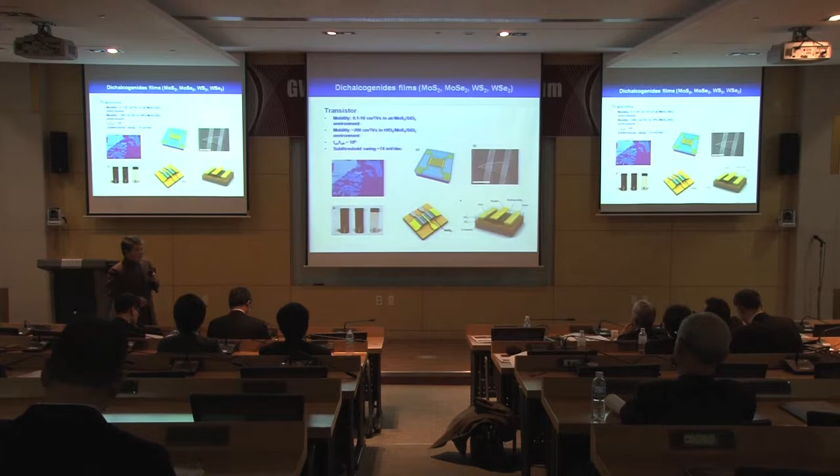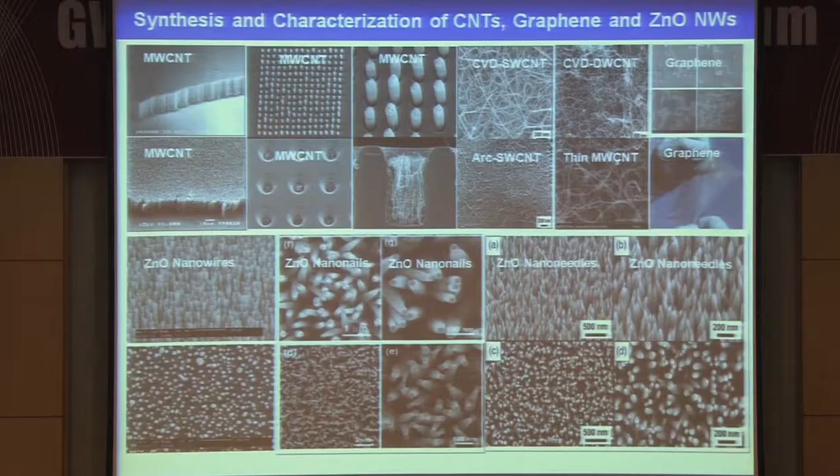Among the interesting application topics, we are focusing on field emission properties and their applications, because carbon nanotubes are very promising and interesting nanomaterials which can present excellent field emission properties. You can see here some field emission based lamps. Another interesting topic is flexible electronics, so we can produce flexible, transparent, thin film transistors using CNT film, graphene, or other carbon-based materials.

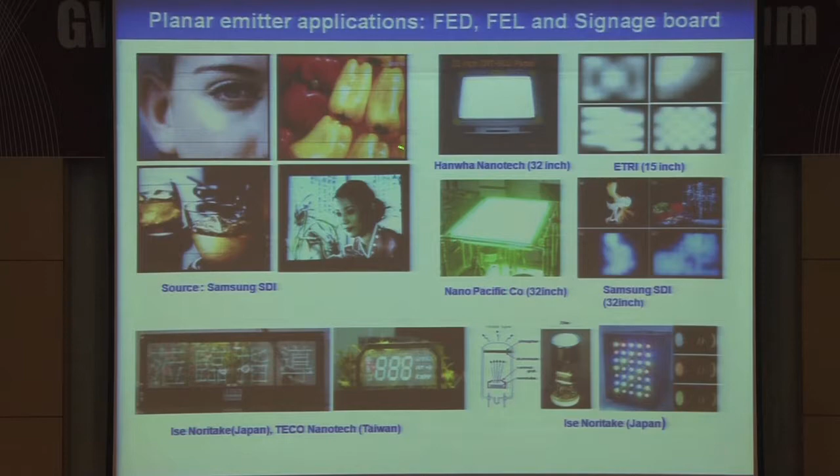I'd like to introduce field emission properties and their applications. You can see here a real field emission display made by Samsung SDI, and this is a flat panel lamp made with carbon nanotube emitters. Also this is a signage board and lamp.

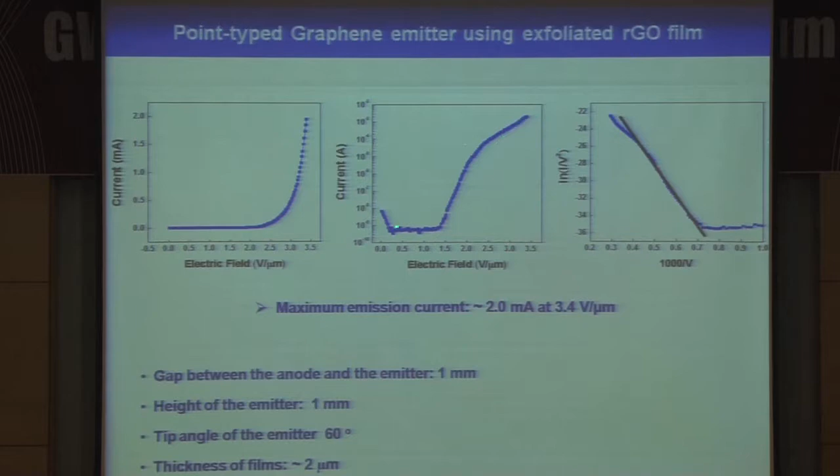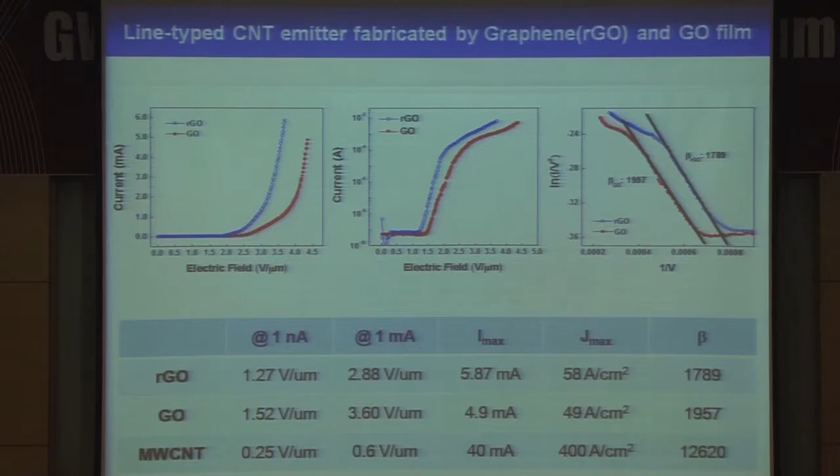We also studied the field emission properties of graphene materials. Graphene also indicates relatively high emission current and good emission stability. However, compared with carbon nanotubes, their emission performance is a bit lower and stability is a little lower. Still, we can use graphene for some emission applications.

We also studied the field emission properties of zinc oxide nanowires. Depending on the shape, we can get high emission current.

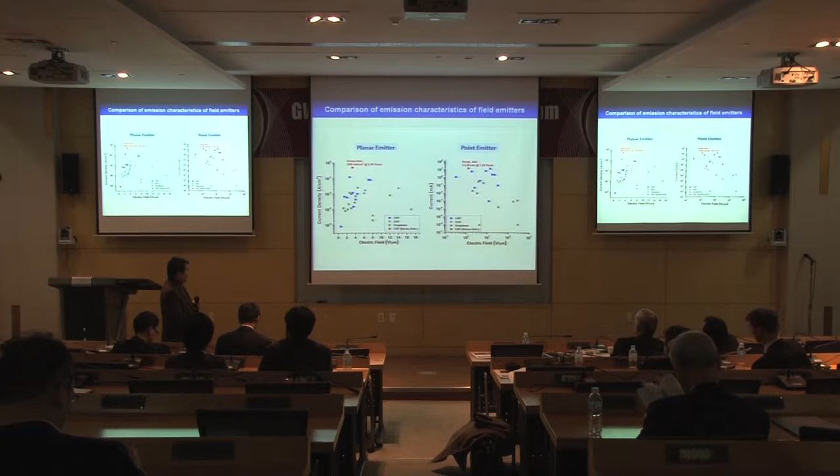When we compare the emission performance of many kinds of nanomaterials, carbon nanotube is still number one, and graphene is acceptable. For point emitters too, carbon nanotube is very powerful, giving high emission current and low turn-on fields. So we suggest this is not yet a fully realized technology. However, for future generation field emission applications such as vacuum nanotransistors, X-ray sources, or e-beam sources, we can use carbon nanotube or graphene as a more effective and powerful field emitter source.

Let's move to the topic of flexible electronics.

We are managing a national project, the World Class University research project, the flexible nanosystem research group. Professors of electrical engineering and two foreign professors joined these groups. Our goal is to realize a flexible, transparent electronic system on a plastic substrate.

So we studied many kinds of carbon nanofilms and evaluated their electrical properties. We studied TFT transistors using carbon nanofilm as a channel and evaluated the TFT device performance. Recently, we have been developing flexible transparent simple transistors using carbon nanofilm channels.

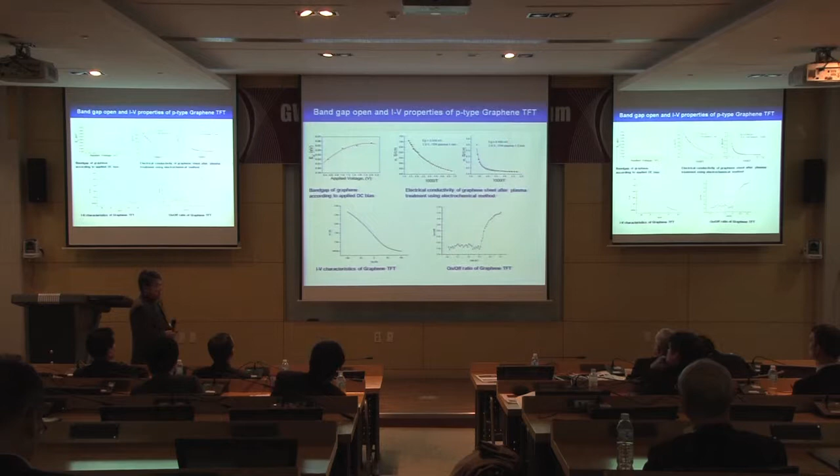Using chemical doping technology, we can get band-opened graphene materials, make TFTs, and check the on-off performance. Still, the on-off ratio is not so high. However, we found some clues to open the band gap of graphene through certain doping technologies, so we are still working on these technologies.

And recently we are studying catalyst-free graphene growth.

One more interesting topic in flexible electronics: we are studying chalcogenide materials. We made molybdenum sulfide flakes, transferred this sheet onto a silicon substrate, and measured transistor performance. The on-off ratio was 10^7, because chalcogenide materials have very wide band gaps and are very stable. We consider this material will be very interesting and powerful for future flexible electronics applications.

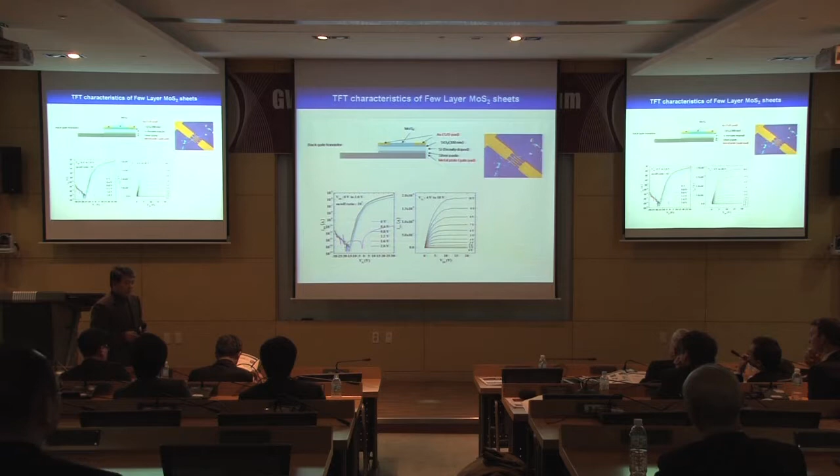One research group studied logic gates using gallium arsenide nanowires and developed this logic gate on a plastic substrate. That group also fabricated memory devices using silicon nanowires on a plastic substrate.

Another group reported and studied energy applications: flexible electrochemical supercapacitors made by carbon nanofilms, and also energy harvesting applications using novel nanowire materials.